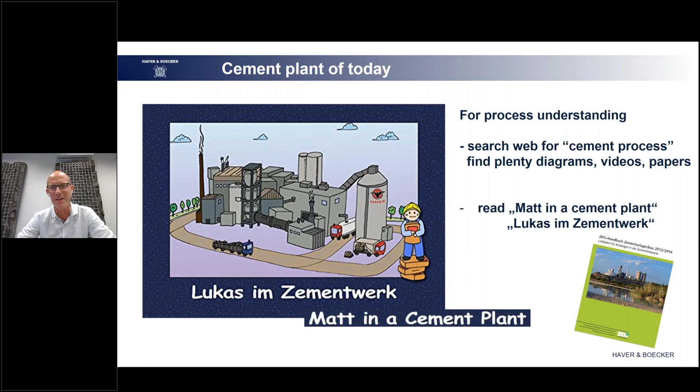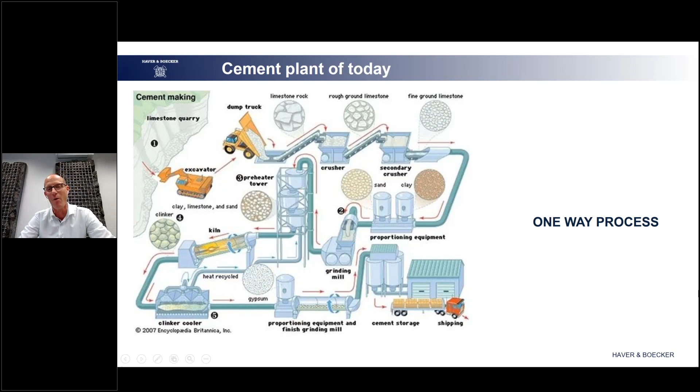What we see here is the one-way process, of course. And not surprisingly, it ends up in one product, which is the well-known cement, with all respect, in all its diversities, of course.

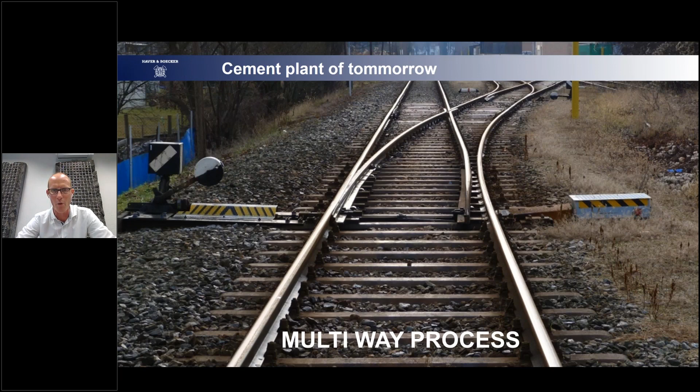What we want to promote is to get inspired about what else we can do in our cement plant, because many of us are facing overcapacities and a very bad market situation due to pricing in the main cement field. So we have our raw materials from the quarry - what else can we do with that? What we want to promote is a multi-way process, leaving the main road to cement.

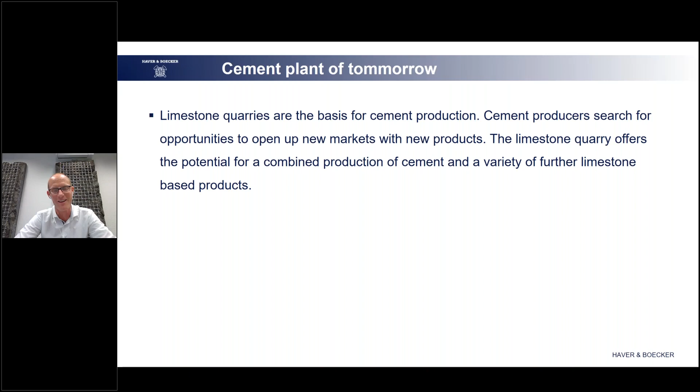As I said, there are a lot of opportunities in our fields, and of course some hindrances, and we want to show how we can go this way. The way could be a combined production of cement and a variety of other products on the same basis.

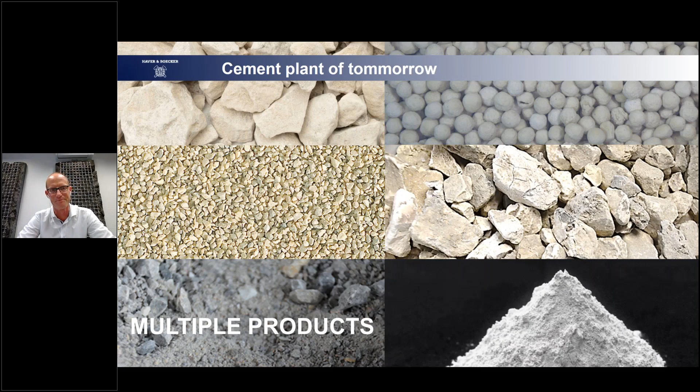Here we see the variety of these different materials - mortar sands, limestone grits, aggregates, burnt lime, hydrated lime, and also granules from mineral-based fertilizers. One look into the different products shows us that on the top we have the raw calcium carbonate, the limestone from our quarry, which we already can sell as aggregates for concrete, for asphalt, that we can reduce in size further down and have beautiful sands for mortars. Or we take the limestone powder and agglomerate some mineral fertilizer granules out of that. Some more details about that later in this presentation.

When we go to the CaO field, after calcination, we have the calcium oxide, also well known as burnt lime, quicklime, mainly used in large quantities as pebble-sized materials for steel production, which goes by train from our limestone works and lime works to the steel production works. It is also ground so that powder is used for paper, plastics, glass industries, but also going into cosmetics and pharma.

If this calcium oxide is hydrated, we end up with calcium hydroxide, also well known as hydrated lime, which is used as a grit or as a powder in water treatment, for example, and also as granules for soil conditioning.

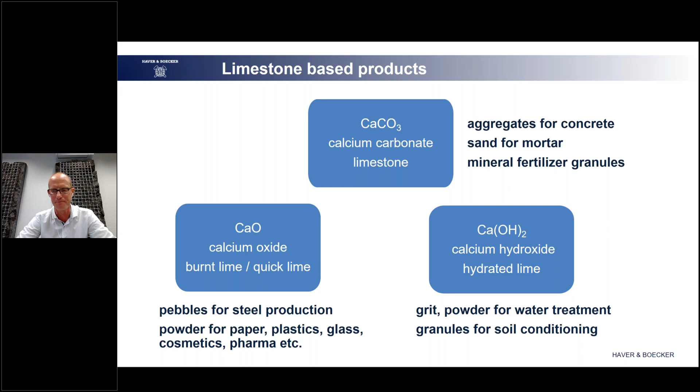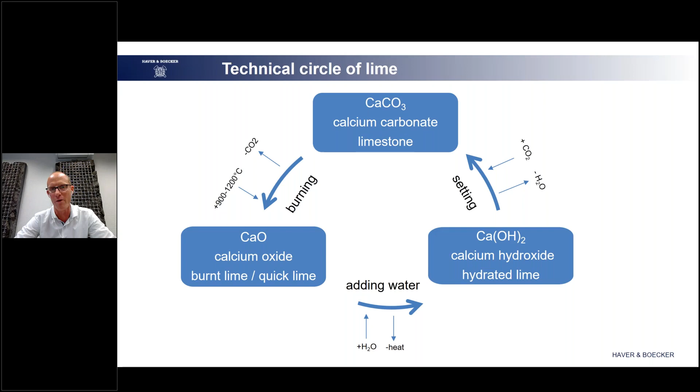I believe we professionals are well familiar with the technical circle of lime, with the different steps from burning the raw lime for the reduction of carbon dioxide to receive calcium oxide, and by adding water to receive hydrated lime. In the setting circle, again, the circle closes and we end up again with pure calcium carbonate.

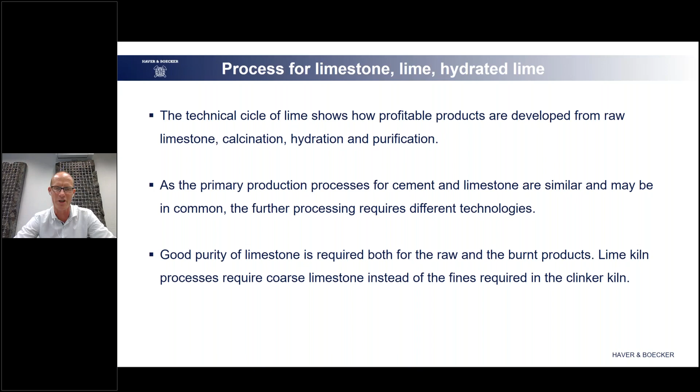What is described already is written down here so that you later on in the proceedings have the chance to follow that again, to share it with your colleagues and friends.

Interesting here are these different steps between the quarry and the kiln, because more effort is taken to receive a good purity, to get, for example, clay contents out of this limestone, and to also get undesired materials like flint and coal out of this limestone. Because inside the lime kilns, we want to receive a good calcium oxide share, and this is exactly decisive for our qualities.

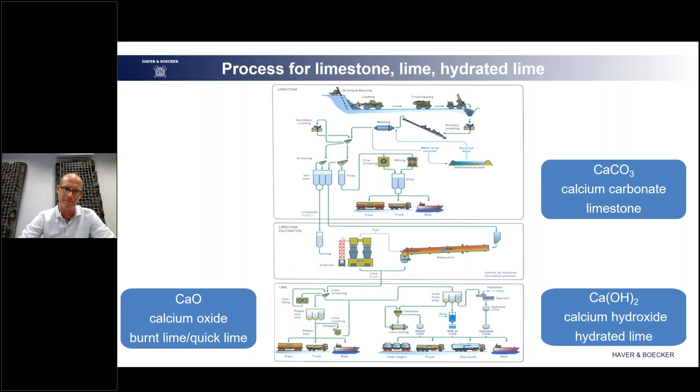So today we talk about inspiration, how we can share these processes and how we can access, with our standard one-way process towards cement, the multi-way process to also access other limestone-based products. How do we access that?

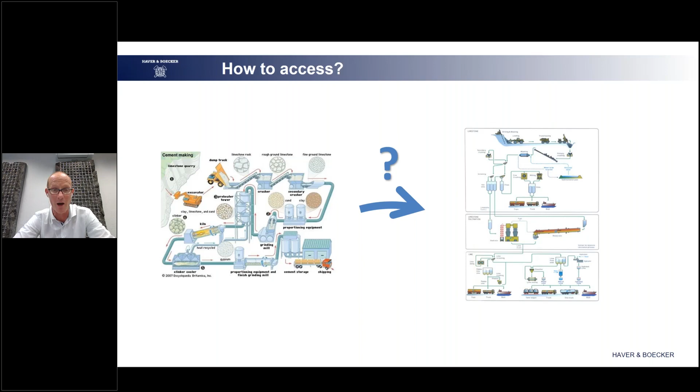The clear answer is to set gates, to create links between that. Because if we have the right qualities of limestone inside our quarries, we can do this multi-production way. But how do these gates and links look like?

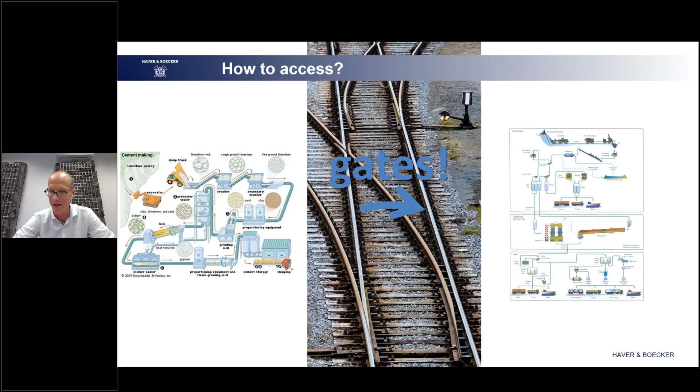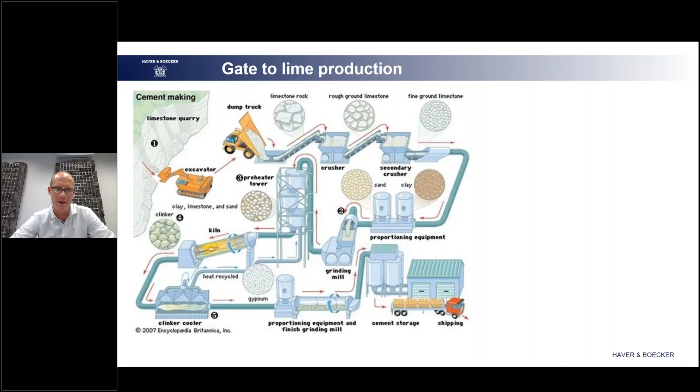Again, we have here the sheet of the material flow inside a cement plant, typically. After the primary or secondary crushing stage, where material is well reduced to a size below 100 millimeters, we can create this link so that the coarse limestone could go to the lime plant, used, for example, as pebbles later for steel production, and use the finer limestone for the cement plant, where it is anyway milled down to a size below 1 millimeter, below 100 micron, before it would end up in the clinker kiln.

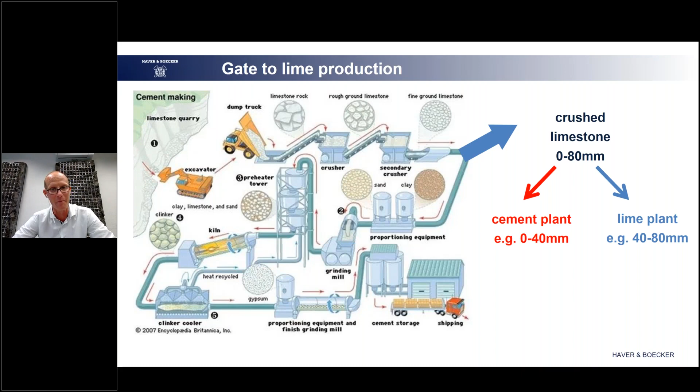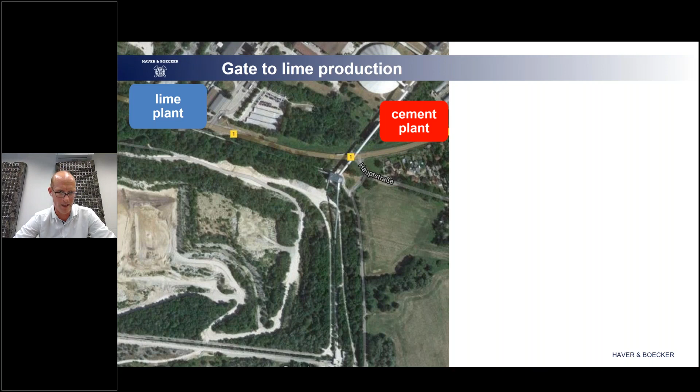And when we follow from the below left corner the way of the belt conveyors, we see one splitting point, which is here a screening machine dividing the coarse material to the left, following the blue path, to the lime plant, and bringing the finer fraction to the cement plant. So obviously here in our cement works, combined cement and lime plants, this is working well already.

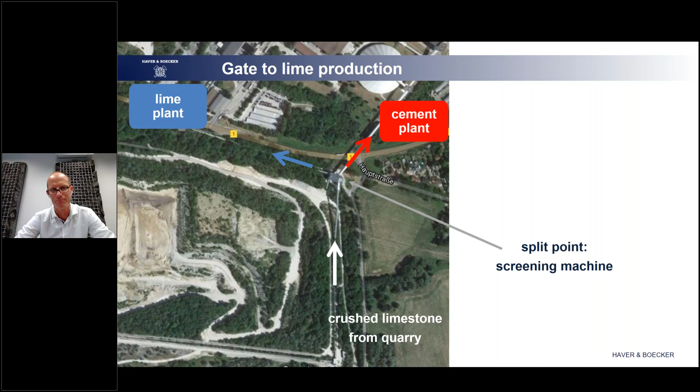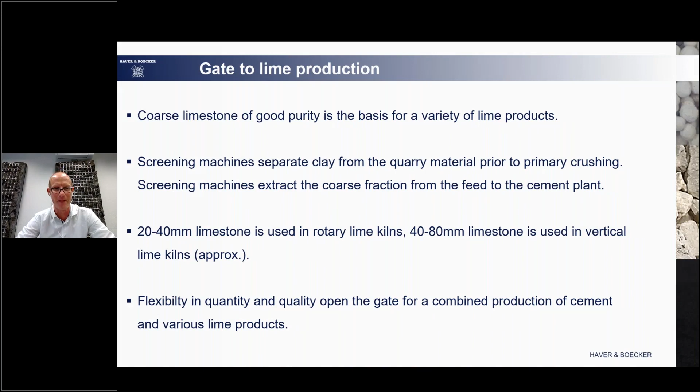What I said, one more time, written down to follow that also and to share that with your colleagues. Yeah, here again, we see what we can gain from that. So from the same quarry, from the same source, we have a variety of different products if we would follow this way. Let's go further into the details of these different materials.

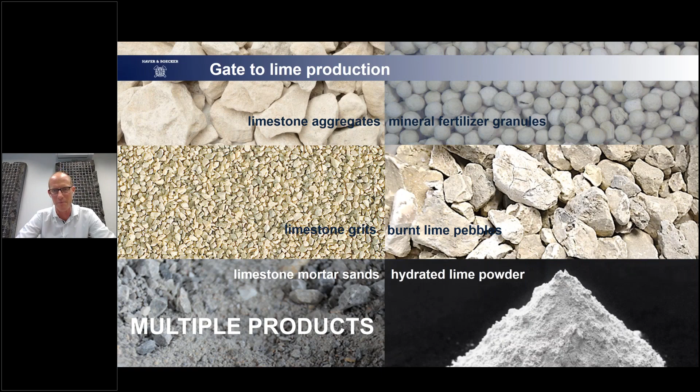Why is Haver actually talking to you about these things? So we want to inspire, of course, and if this is a kind of inspiration and you see, okay, Haver's talking here the same language we do, we have similar aims, we can offer you a wide range of solutions in these fields, coming from like screening, crushing and screening plants,

going further to final processing steps like final screening, going to loading systems, which means bulk loading, train loading, ship loading, and also truck loading, together also with our friends from IBAU Hamburg, of course, complete silo systems in these fields. Packaging solutions with our friends from Haver and Boecker. So powder packing, granule packing into bags, into big bags, into small containers.

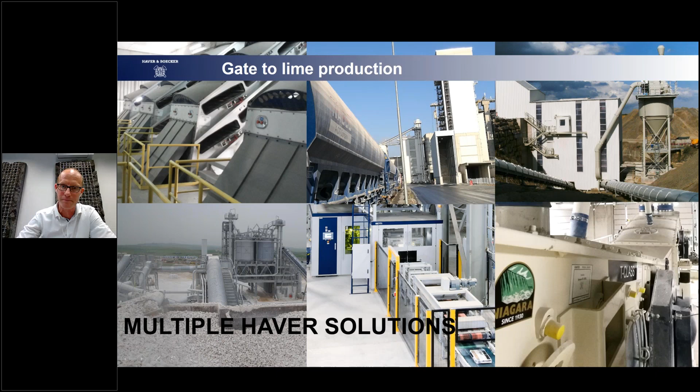The first of three products I would like to go into more detail is the production of dry mortars, mixed cement. Because we understand that there's of course an international trend that producers that were in only cement production in the past would like to gain the profits of adding some value to their materials, creating mixed cements at least, or dry mortars in a more sophisticated way in the future. And yeah, how does that work actually, and what is necessary for it?

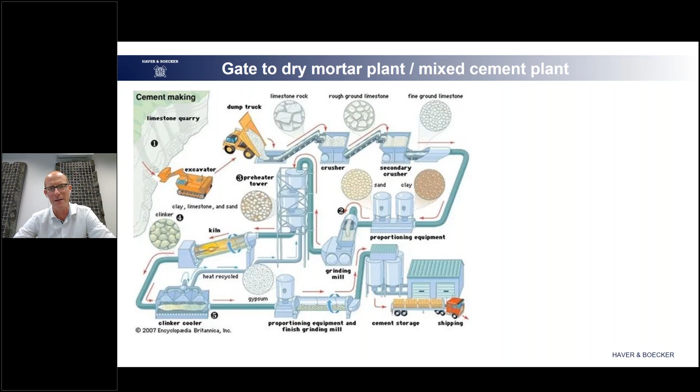Again, we are here in our chart, and today we have another split point, because to receive the ingredients for dry mortars and mixed cement, we need, of course, the binders, the cement here in this field, which we have already in our final silos, but also to create the typical sands we need for it. Yeah, and here we can just go into the raw grinding mill, and here we extract material which is like minus 2 millimeters, for example. And there we have the link, the exit, to create these mortar sands.

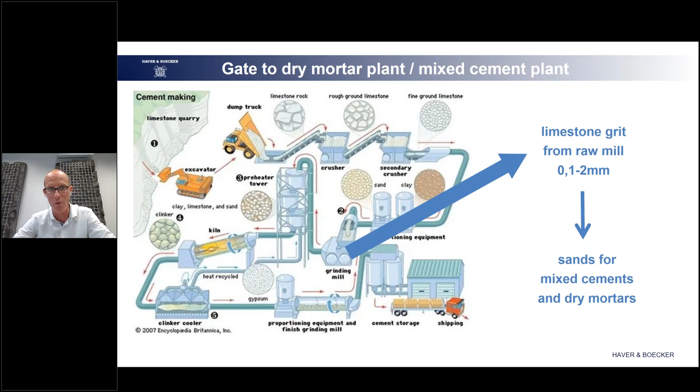How does that work? One example here from a cement mill, a raw limestone mill, type of vertical roller mill. In the vertical roller mill, you know that we have the ventilator at the bottom, and we have kind of wind sifting in the head of the vertical roller mill, which actually has the only dedication to transport the raw limestone powder to the filters, and later on transported to the clinker kilns.

But here we want to create the link towards the dry mortar production. And I believe beginning in the 90s, we have a concept here that it is possible to extract from the head of the vertical roller mill the grits, the sandy grits that are not small enough already to leave the head of the vertical roller mill as a powder, and shall not fall down again and be ground again.

So we can extract exactly these grits, say 0 to 2 millimeters, and take this material, do a sifting step, so to reduce the minus 100 micron materials, and then by doing some fine screening inside a Haver fine screening plant, create the typical grades we need later on for our mixed cements and dry mortars, which are, for example, 100 micron to 300 micron, 300 to 600 micron, 600 micron to approximately 1 millimeter, however you and your customers need that.

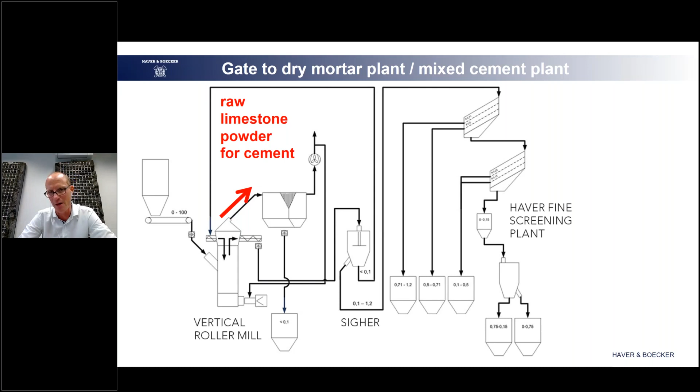So that is a very, very easy link, which works, of course, with a vertical roller mill, but also with the roller presses, and also the ball mills, which have a different setup, but it is important to have a pre-sifted material to bring it into the fine screening plants.

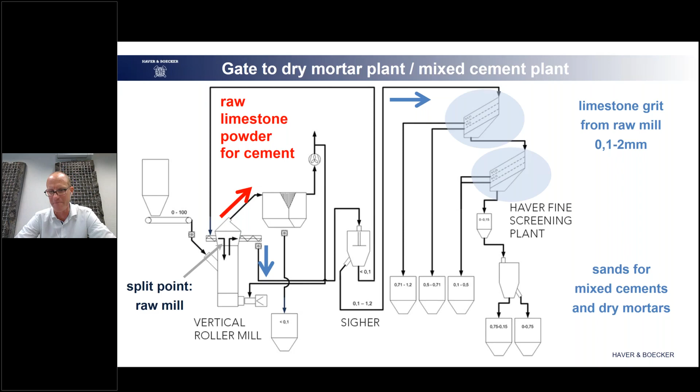Here we are, and these are the decisive points here. Easy enough, actually. As our core business is the production of cements, we have actually all the main ingredients for the mixed cements and dry mortars in our house if we were able to create the right sand fractions.

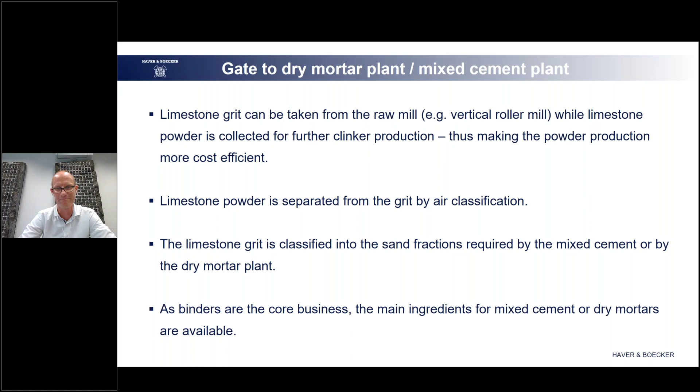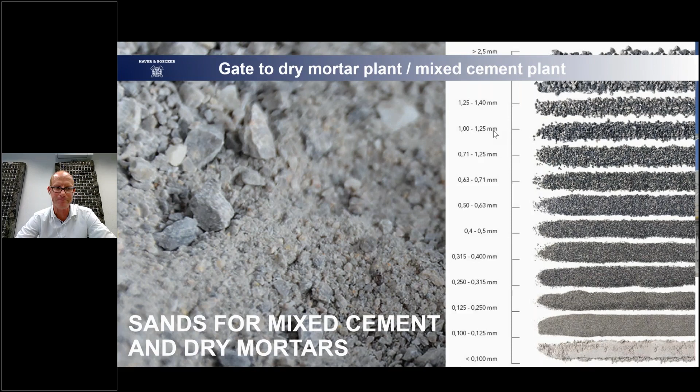Haver could support you in this field and propose to you screening plants, for example, which is the single screening equipment itself, but also wider solutions with the auxiliaries and environments in this field.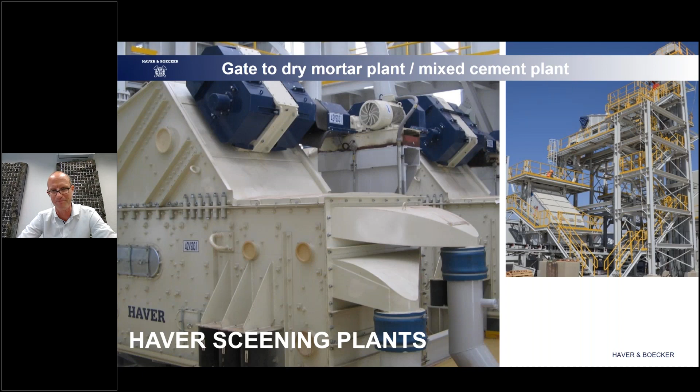The further concept I would like to introduce to you is, of course, the production of organic fertilizers from the same source. I believe during this week you will receive also the invitations for one very dedicated webinar in this field held by my colleague Dr. Jan Lamke. He will show you the very details of these processes and how money can be gained from that from a quite economic perspective. But just as a small teaser, I would like to show you what this will be about.

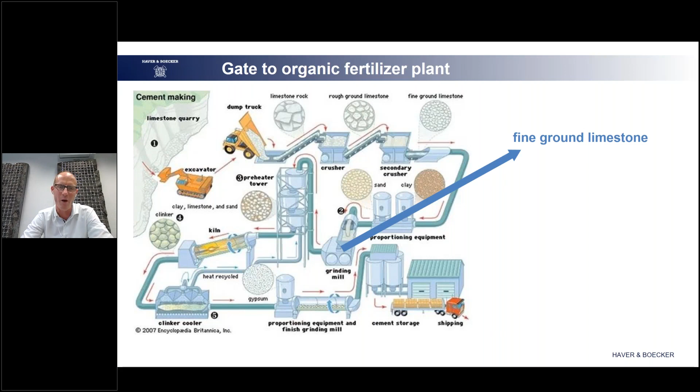Again, the basic flow in our cement plant. And here we can use again the fine ground limestone, as we need powder particle sizes for the agglomeration later on. We can also reuse the limestone dust that was taken from the primary, secondary crushing stages, from the limestone mill, from the preheating. It is only important that we have a raw limestone powder here, and we collect it and bring it to the fertilizer granulation plant.

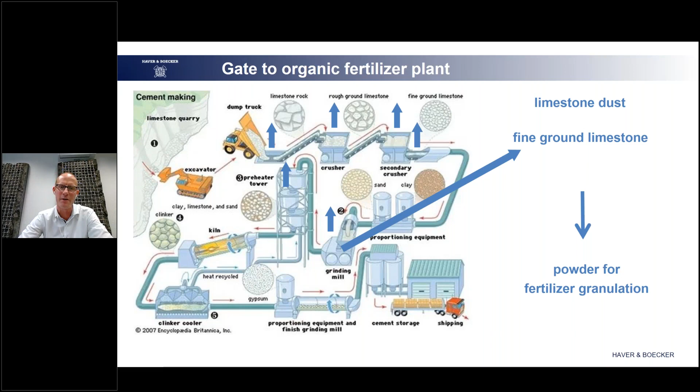And inside this fertilizer granulation plant, we need powder material. We add water and binders, and we can receive a very tight particle size range of limestone granules, which have been added also with other nutrients our plants need to grow. So today we have the great task to feed the world, to feed the growing population of our world. And this cannot be done today, and also, of course, not tomorrow, without the fertilizers.

And if the trend is followed as we see it today, it will not only be synthetic fertilizers. We want to have good food. We need to use organic fertilizers. And this is the actual way we can help. We, as the cement producers, can help to feed our population healthily, producing and selling the organic fertilizer granules. And here we talk about, in Europe, 100 euros per ton, 150 euros per ton, as only one example we have here, for example, from France or Poland, from our processes.

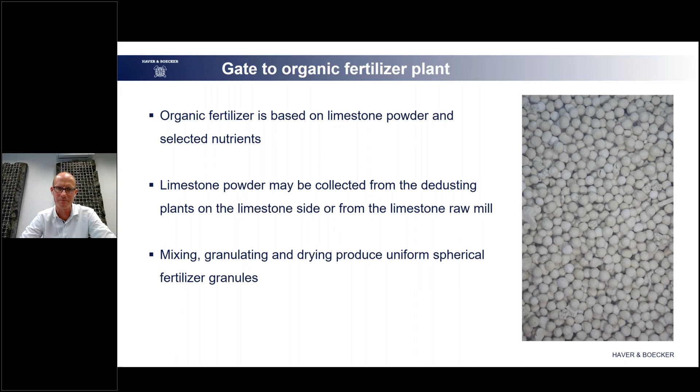As I mentioned before, this is just a small hint, a kind of teaser, and in the next few days you will receive the invitation to go more into this interesting and economically interesting process in the field of pelletizing by Dr. Jan Lamke.